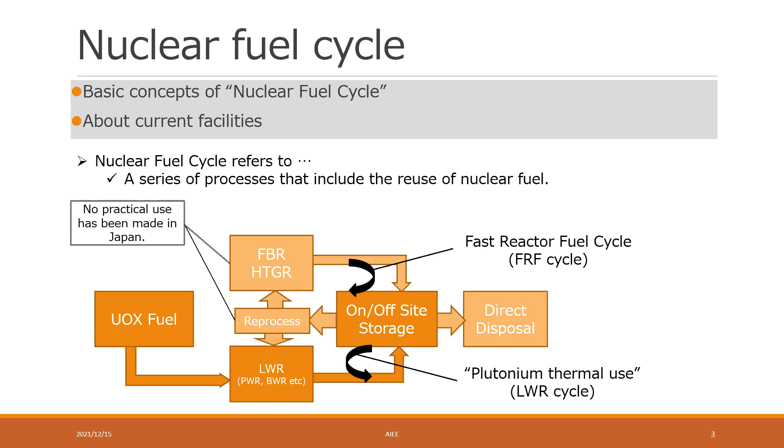Among these are the fast reactor cycle and the light water reactor cycle, and the LWR cycle in particular is sometimes referred to as a pluthermal cycle. Currently, only light water reactors exist in Japan, so it is hoped that the LWR cycle will be commercialized soon.

Next, I'll explain the current situation in Japan. There are 9 nuclear reactors in operation in Japan, and 4 of them are plutonium thermal reactors. There are 19,000 tons of spent fuel in Japan, which is 78% of the capacity. Reprocessing plants and other facilities are not in full-scale operation.

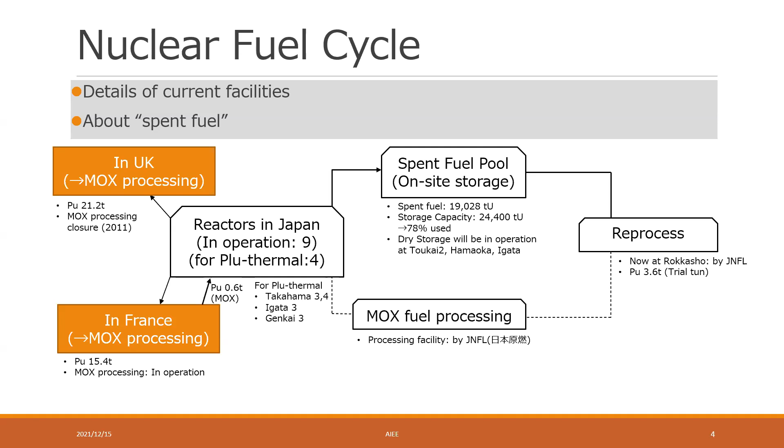The reprocessing plant is to be built in Rokkasho village in Japan. Some of the plutonium has been shipped to other countries, most of it to the UK and France. Some of it is coming back to Japan as MOX fuel.

Next, I will explain the treatment of the nuclear fuel cycle in the basic energy plan in Japan. In the basic energy plan, 3E plus S is listed as the basic principle. In addition to that, the advanced 3E plus S is required in Japan.

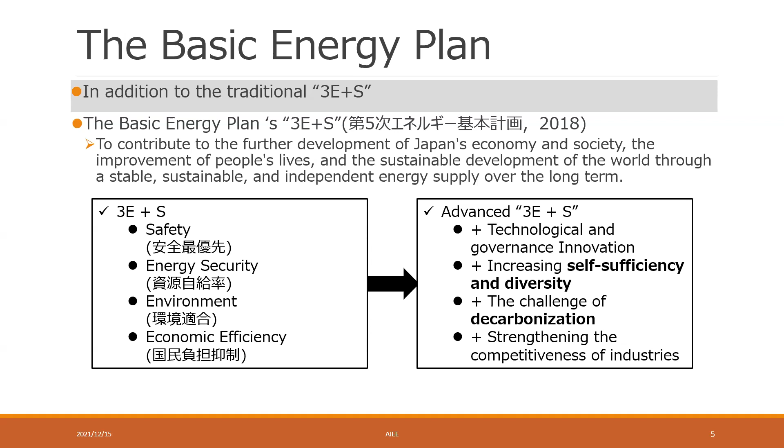In the text, the goals are set to increase energy diversity and self-sufficiency, and decarbonization is cited as a major issue. The nuclear fuel cycle will basically be promoted, and it is expected to help solve energy problems.

In the LWR cycle, the goal is to have no extra plutonium, and there is a need to study the management and use of plutonium. In the report, the future of the fast breeder reactor Monju, which was built in Japan, is discussed, including the decommissioning of the reactor and the use of its findings in the future.

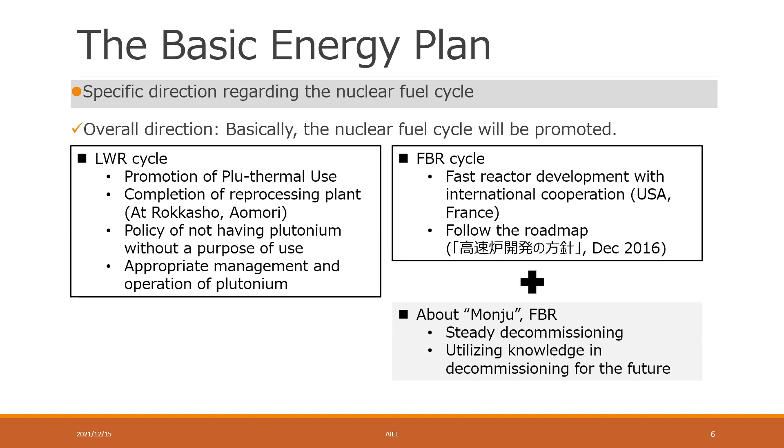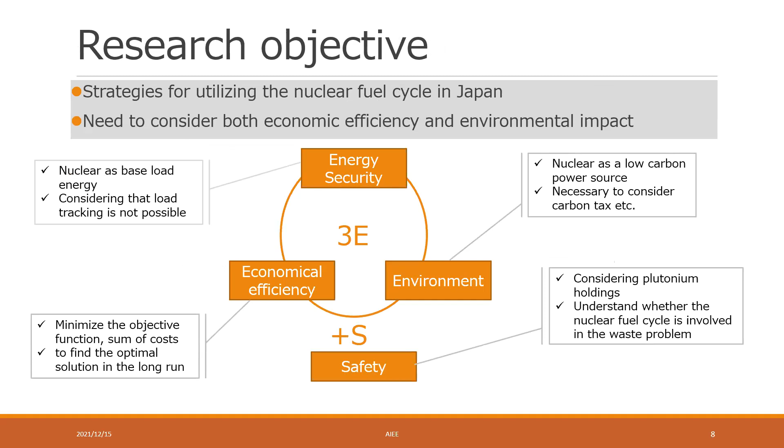Next, I would like to talk about my research. In line with the 3E plus S philosophy, I will consider the optimal power supply configuration for Japan, including the nuclear fuel cycle. The model in my research is made as follows. The objective is to calculate the optimal operation by minimizing the sum of these costs.

By combining the model of the nuclear fuel cycle with a model that aims to optimize the energy mix in Japan, I aimed to refer to the competitiveness of the nuclear fuel cycle in Japan and the necessity of fast breeder reactors and other facilities related to the nuclear fuel cycle.

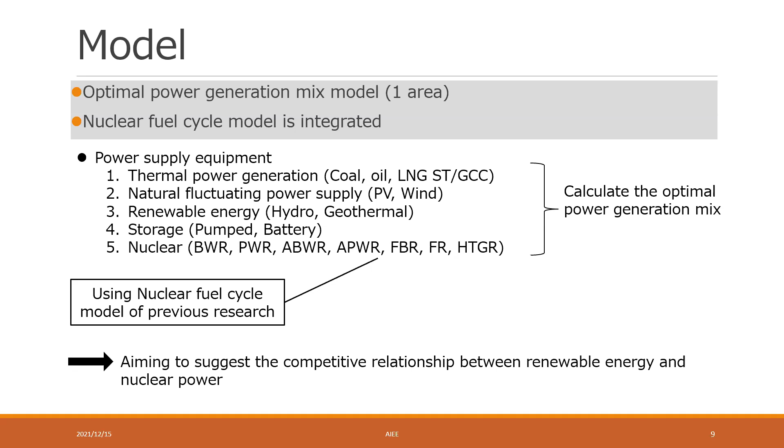This is a rough structure of the model. Input data is load curve and cost data, uranium price, and so on. I set constraints about efficiency or upper limits, and output data are a power generation mix and the plutonium balance and the capacity of the plants and so on.

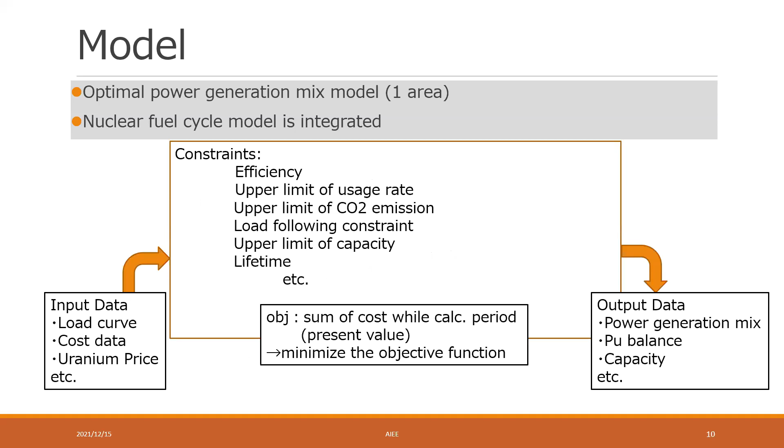In this calculation, in order to make the calculation for the next 100 years more accurate, a calculation for 120 years was performed to reduce the influence of the terminal effect.

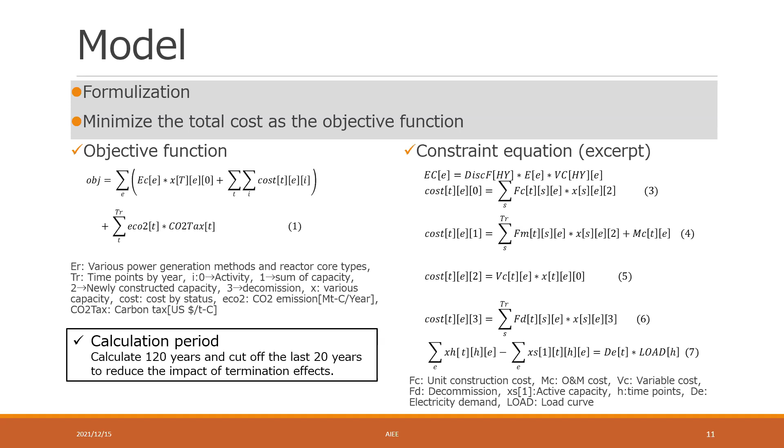Here are some of the important assumptions made in the calculations. In this calculation, it is assumed to have zero carbon dioxide emissions in 2050. This means that thermal power is not used. This is based on the assumption that zero emissions in the power generation sector should be achieved as early as possible, referring to one of the targets in Japan.

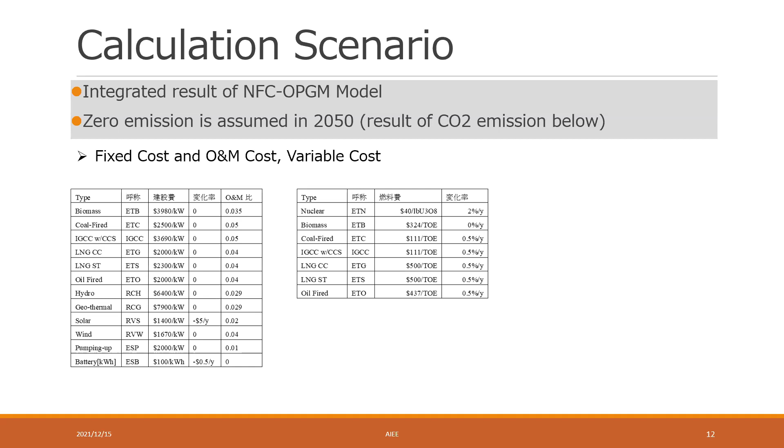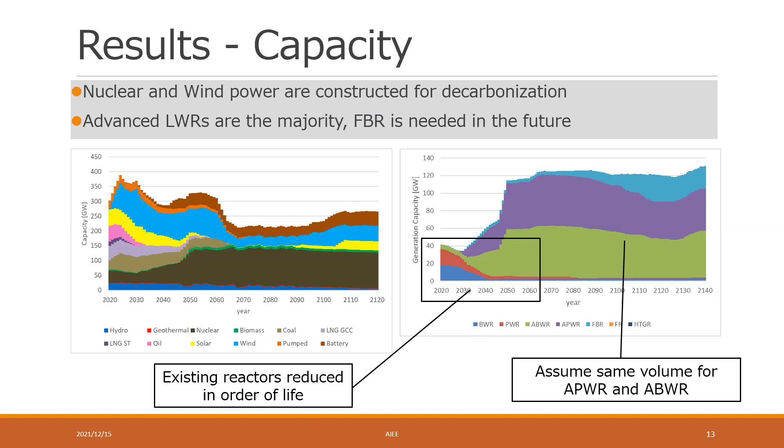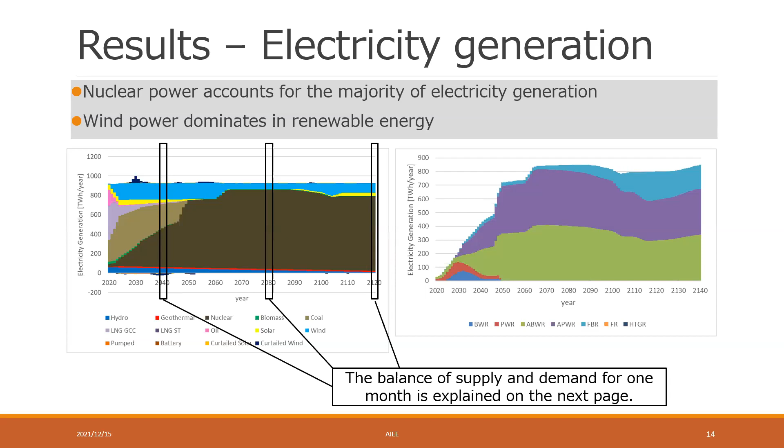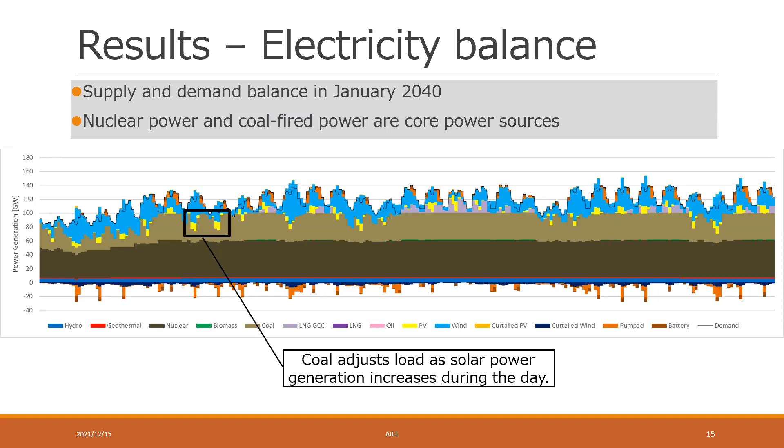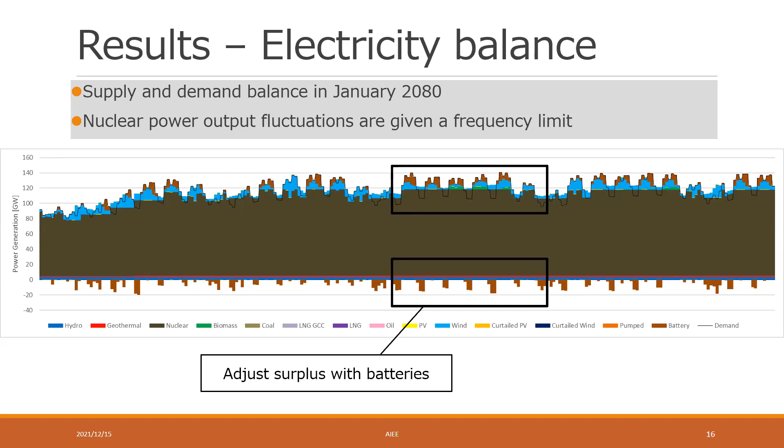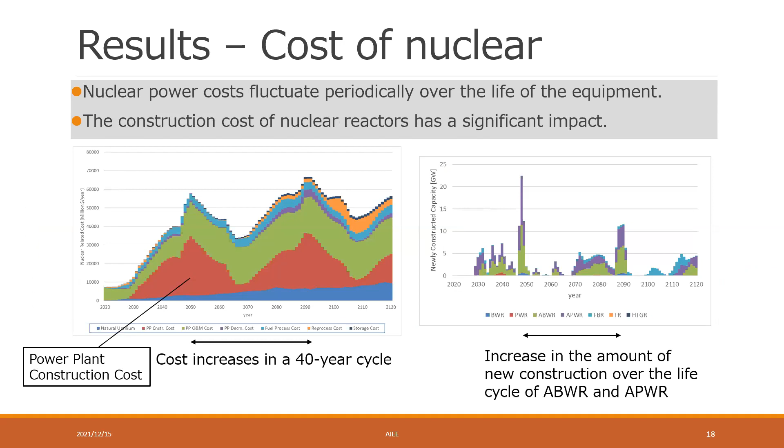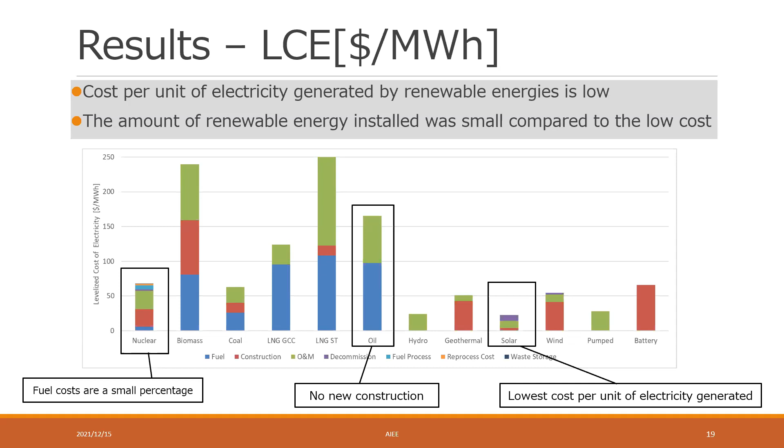Despite the low cost of solar power, the amount of solar power installed is low. Oil power, which is expensive to run, was not newly constructed. In particular, the reasons for the lack of adoption of solar power are thought to be as follows: it is dependent on hourly fluctuations, and so it cannot fully respond to our demand fluctuations when it is introduced in large quantities. Unlike wind power, the supply of solar power is highly time variant with little regional difference.

In addition, compared to the current spent fuel in Japan, the amount of both storage and high-level waste would be considerably higher under this scenario. FBRs, which do not have an upper limit on the amount of MOX fuel used, are introduced in large quantities and consume a large amount of MOX fuel. The amount of plutonium in storage may decrease accordingly.

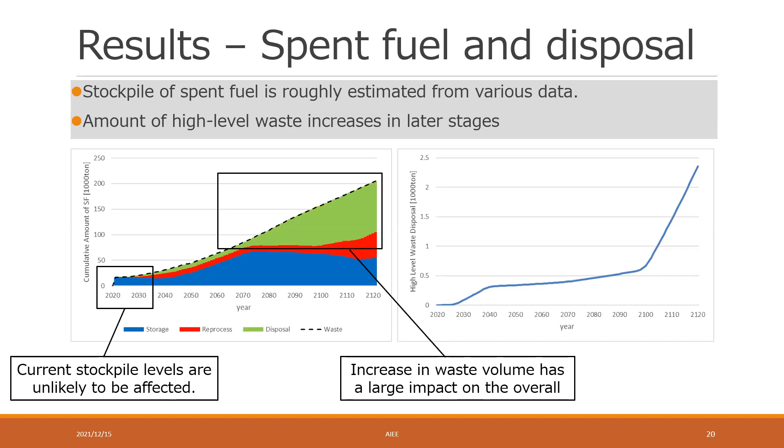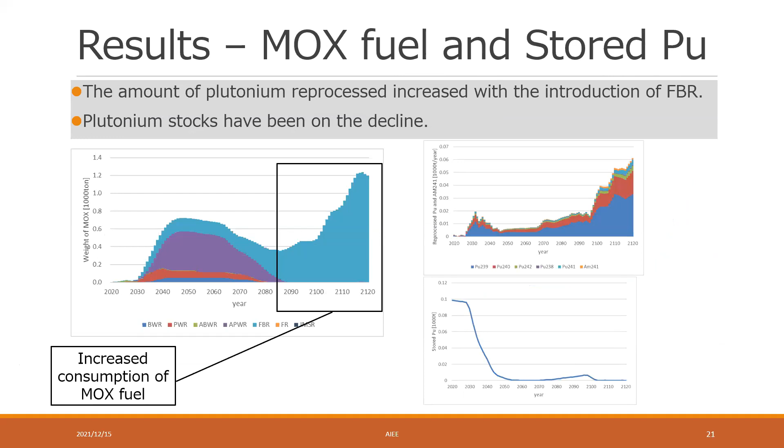This suggests that the use of MOX fuel is effective in reducing the plutonium stockpile. Here is a summary. These results show that it will make a big difference compared to the current situation, and that it will be difficult for solar power to be introduced in large quantities.

As a third point, although PV power generation had the lowest unit cost, it has not been massively adopted, probably because the amount of power generated depends on the amount of sunlight incident and is highly time dependent.

And the amount of high-level radioactive waste has increased greatly to 2,000 tons in 100 years, and it is necessary to select a site for disposal in practical terms.

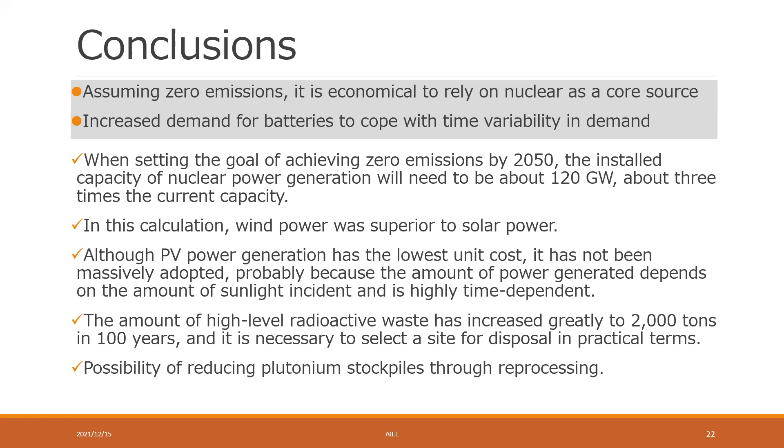These are my goals for the future: technologies related to nuclear power, such as the economic evaluation of hydrogen production using high temperature gas-cooled reactors, called HTGRs, should be introduced into the model, and I'm trying them now. I also believe that CCUS technology must be considered in the quest for a low carbon society.

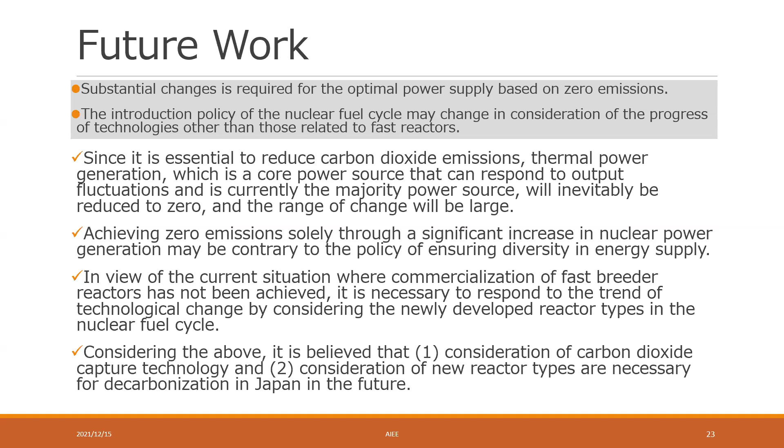Based on these considerations, I believe the analysis should continue, and I should take into account the CCUS technologies in this model. Thank you for your attention, and thank you very much for your time.

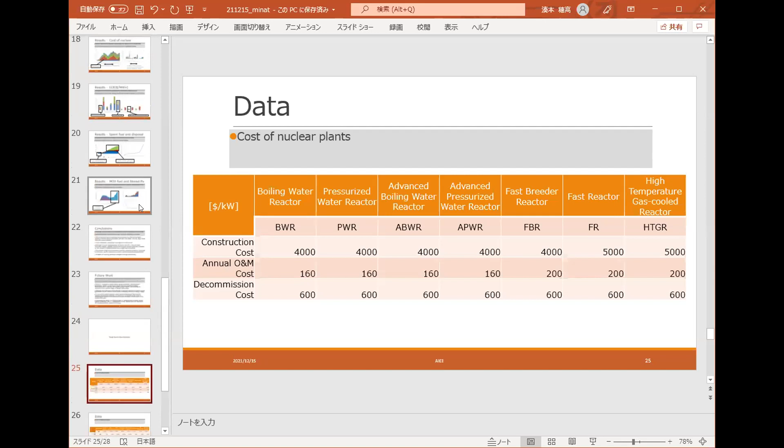I set the data as a little higher than other countries in Japan because of social problems, so maybe in other countries the costs are lower than in Japan. So maybe it is a useful method in other countries too. Yeah, that's all. Okay, thank you very much.

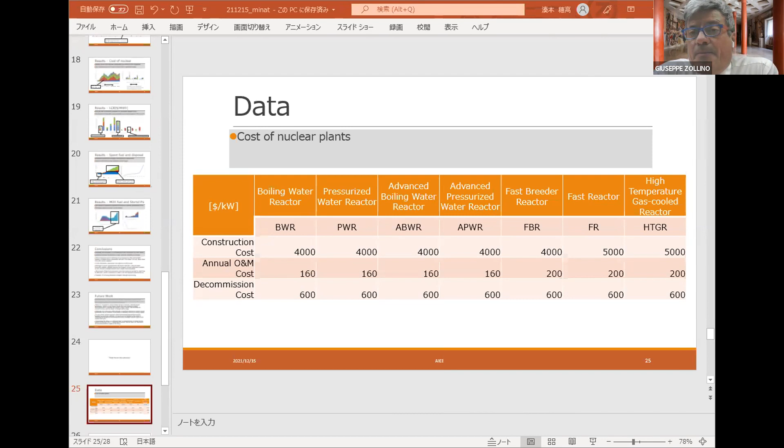However, I have another question for Mr. Minatomoto. In my faculty, in the University of Padua, I am involved in a kind of analysis which is pretty similar to yours. We also are simulating scenarios with an hourly analysis. We consider hour by hour demand and generation. The question is, the PV and wind profiles you just showed, are they the presently recorded profiles, or did you get them from a database with the forecast of PV and wind generation?

I mean, are those profiles recorded now in Japan out of the existing plants, or do they come from, let's say, extrapolation, analysis, satellite measurement, and whatever? Did you fetch them from some database, or are they measured? This data was from a forecast. So I don't know what to say. This data was from Amedas in Japan. Amedas is just a kind of official data in Japan.

Official data. So they come from the grid, from the real plants. Okay. Yes. So they take into account the real situation. I mean, when it is raining, the PV generation is very poor, or when no wind is blowing, the wind generation is zero. It is the real measurement. Okay.